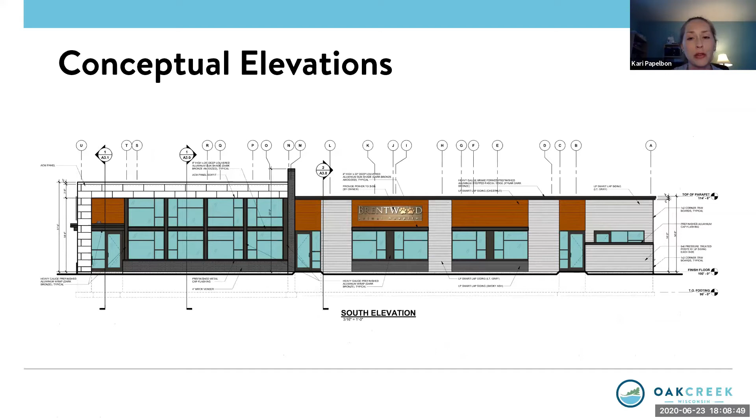On the screen, these are conceptual elevations, but this is what the south elevation of the proposed building would look like. This is the entrance on the south elevation.

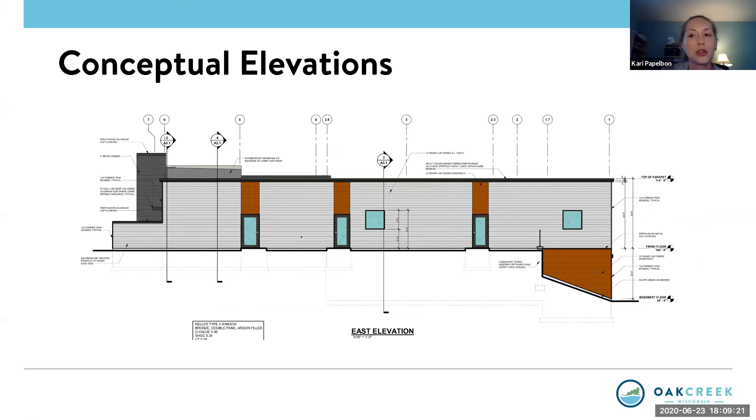And then on the east elevation, this is the conceptual elevation that you might see partially as you're traveling westbound on Ryan Road.

Should this be recommended for approval and proceed to conditions and restrictions at the next Plan Commission meeting, these are some of the items staff will be incorporating into those proposed conditions and restrictions for consideration: landscaping for parking areas, since we have a lot of parking adjacent to Ryan Road, we have requirements for screening along public rights-of-way. Probably some additional wraparound landscaping on the east side will be required as well. That requirement for review, however, would come at a later date when we're reviewing site and building plans.

Stormwater management and green infrastructure will be required for the property with the addition of the building and the parking. Outdoor storage would not be permitted except for the traditional trash enclosure, and we're not really considering outdoor storage as part of the proposed dog run, but we want to make sure we limit the outdoor storage capabilities, meaning no trash or pallets that might have to go into the dumpster. Just make sure the outdoor storage is limited. Lighting as necessary for the parking lot, and outdoor kennels and dog runs will probably have a couple of ideas for making sure we have those things covered.

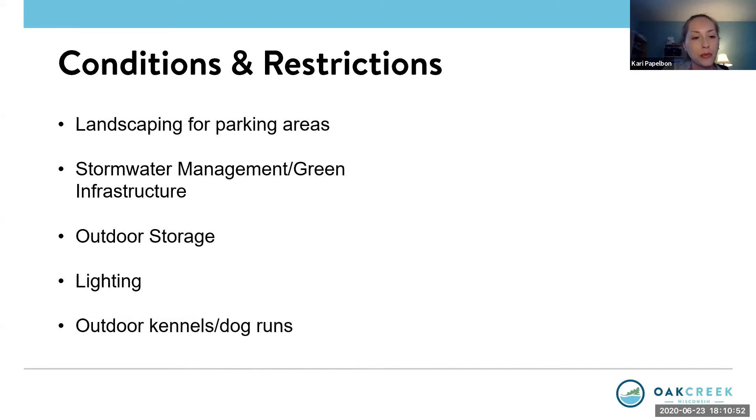My name is Brad Egan. I live at 6011 Artist Bay in West Bend. I am the owner's rep for the project, and we hope to get this approved tonight.

Okay. We'll stand by. We'll go to the commission, and if there's any questions, hopefully you'll be able to take care of it. So, thank you.

Brett, would you like to say anything? Thanks a lot, it's actually Brad. Oh sorry, so Brett's with me. Okay, it comes up on my screen as Brett. That's fine, let me mute my other computer here.

So yeah, I echo what Brad Egan said, that we're interested, obviously, our interest is to get the plans approved so that we can further grow our business and improve the animal care in the city of Oak Creek.

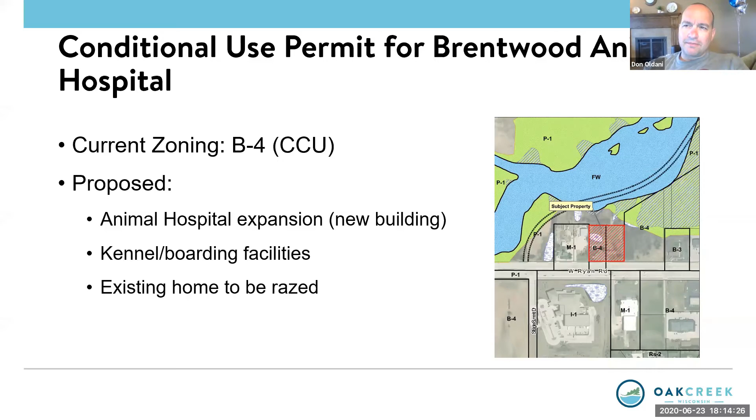I have no questions. Commissioner Seipert. Yeah, I have one question. What about the extended wetlands? Are they going to interfere with the expansion into that area, which is on the northwest corner?

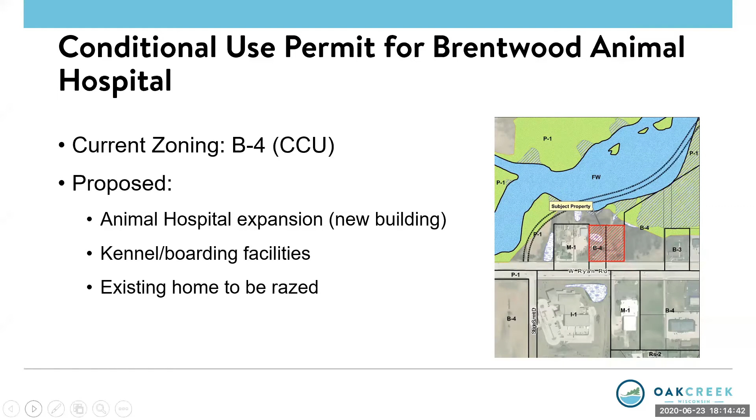Brad, you want to handle that one? Brad Egan, hear me? Now I can, I guess. Yeah, this is Brad. We have a civil engineer retained, and they are doing the stormwater management and will handle the existing wetland condition. Thank you.

Okay, Commissioner Chandler. I do have a question for the applicant. And just also a side note, my puppy, who has passed away some years now, also went to this place. So my question for the applicant is, can you share more information on what's expanding? Is it that you're going to have more kennels, more hospital space?

You want me to take that, Brad? I can address that. So yeah, the main purpose of the expansion is to expand the hospital space, to expand the veterinary side of our business. We are limited currently with the growing community and the expanding pet population of the community by space. Currently, we have 5 exam rooms and we have 5 doctors. And in order to efficiently service the community...

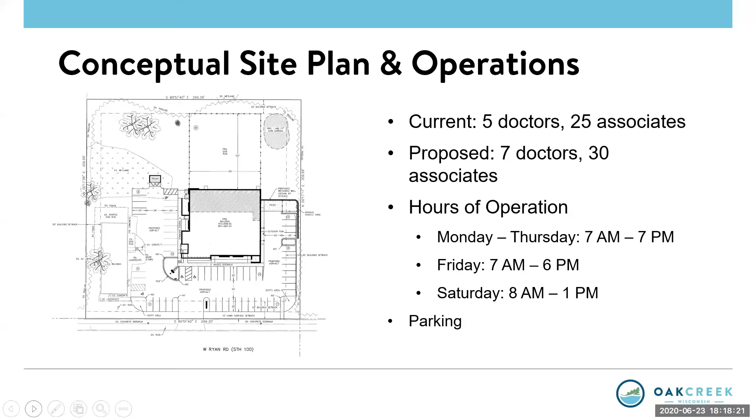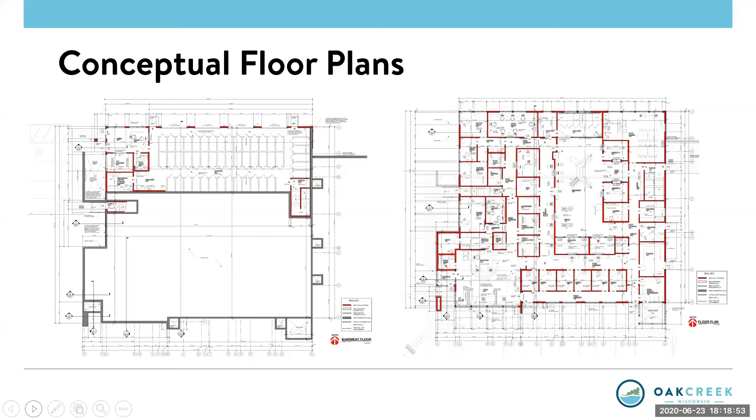The boarding facility, the boarding part of it is we have an exposed basement. There's an increased demand for more interior boarding, so not outdoor boarding, but more higher end interior boarding or inside boarding, and that's going to be the bulk of the boarding for the new facility. So that's the purpose of the luxury boarding, I guess you could say, for the new building versus the traditional indoor-outdoor kennels that we have in the existing building right now.

Does that answer your question, Chauncey? Yes, it does, thank you. Okay.

Is that it? Any other questions? I have no further questions either.

I'm glad to see you're expanding. I think the commissioners hit it right on the head. You've been nothing but an asset to the city of Oak Creek and our pets. I'm glad to see you decided to stay in Oak Creek. It's a testament when half the commission has used the service you're providing. So great to see that you're expanding.

Appreciate that. Thank you. If nothing else, motion, please.

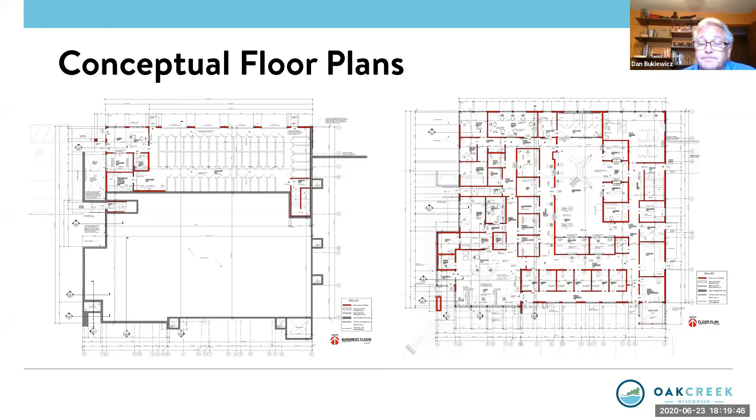Seifert moves that the Planning Commission recommends that the Common Council approves a conditional use permit for an animal hospital with kennel and boarding facilities on the property at 318 West Ryan Road, after a public hearing and subject to conditions and restrictions that will be prepared for the Planning Commission review at the next meeting, July 14th, 2020.

Lorick, second. Roll call. Hannah, aye. Sullivan, aye. Grillo, aye. Lorick, aye. Gavich, aye. Donnie, aye. Seifert, aye. Chandler, aye.

Okay, congratulations, guys, and good luck. Looks good. Thank you. Thank you.

Item 5B, consideration of a conditional use permit by Oak Creek Industrial LLC for a freight yard, freight terminal, transshipment depot facility on the property at 102 West Oakview Parkway. Gary?

Thank you, Mr. Mayor. This is a property that has an existing multi-tenant industrial building on it that had been previously reviewed by the Plan Commission and approved in December of 2016. The current zoning is M1 PUD. It is part of Oakview Business Park, right on Howell Avenue.

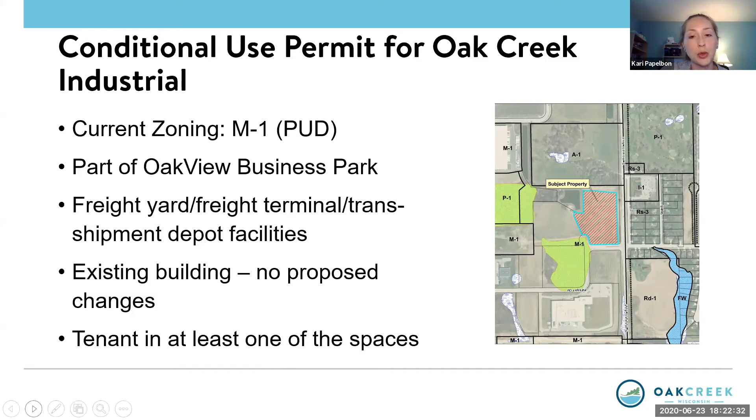Again, it's going to be within the existing building. No changes to the site or the building are proposed as part of this request. They do have one tenant, though that tenant has not been made part of their submission. Currently that tenant would be occupying about a third of the building, and there might be options for that tenant to expand, but there could be up to, at any one point, 6 tenants in that building.

This is a shot of the approved site plan from 2016. They currently have 12 loading docks, although they were approved for 28 on the west side of the building. They also have 20 striped truck and trailer parking stalls immediately across from those docks, and an additional 9 trailer truck parking stalls in the northwest corner, next to one of their dumpster enclosures. They also have employee and visitor parking separated from that truck and trailer parking on the west: 22 stalls on the south side and 113 stalls on the east side of the building, for use by approximately 135 employees anticipated on site at any given time.

This is anticipated to be a 24/7 operation, allowing for the most flexibility for any tenant that would be in there. Hours and days of operation would change based on tenant needs, but right now they're requesting the max based on the current tenant's needs. They also list primary hours, where the most activity would occur outside, from 5:30 to midnight, including loading, unloading, and interior functions of the facility. There is no outdoor storage proposed, nor would it be approved for this conditional use request.

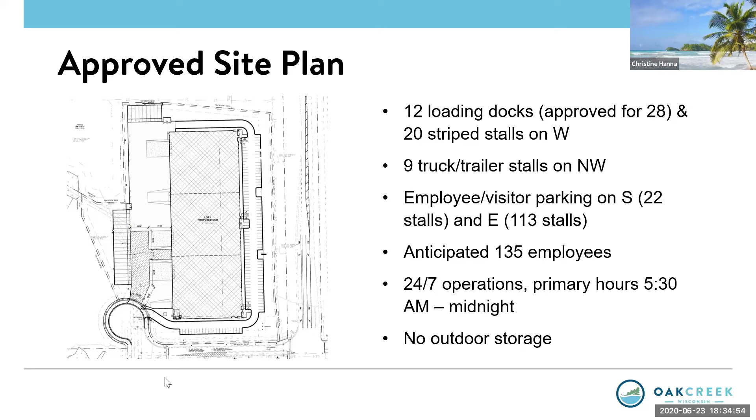Yes, anybody within 300 feet of this proposal, should it have another proposed use at some point in the future, would get notification of the Plan Commission as well as the Common Council hearing. Okay, sounds good, thank you. That's all my questions. Okay, thank you.

Anybody have any last comments? Okay, I really don't have any issues at this time. I think Mr. Randall summed it up. It's very similar to what we did at 6th and Rawson, so I don't have any issues at this time.

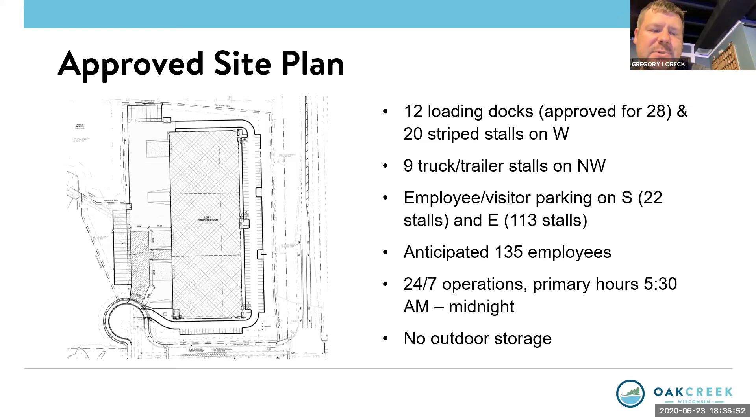With that, we'll entertain a motion. Loreck moves the Plan Commission recommend that the Common Council approve a conditional use permit for freight yard, freight terminal, transshipment depot facilities on the property at 102 West Oakview Parkway after a public hearing and subject to conditions and restrictions that will be prepared for the Plan Commission's review at the next meeting, July 14th, 2020.

Hanna second, roll call. Hanna, aye. Sullivan, aye. Carrillo, aye. Lorick, aye. Kavich, aye. Ladani, aye. Seifert, aye. Chandler, aye. Okay, very good.

Good luck, guys. Thank you.

Item 5C is a lighting plan review. This is the photometric plans submitted for Mod Homes LLC at the residence at Oakview for the internal roadways, and it is located at 10730 South Howell Avenue.

Lori, we got you. Got this one, Mr. Mayor. You got this one, Lori? Yep. What are you here for?

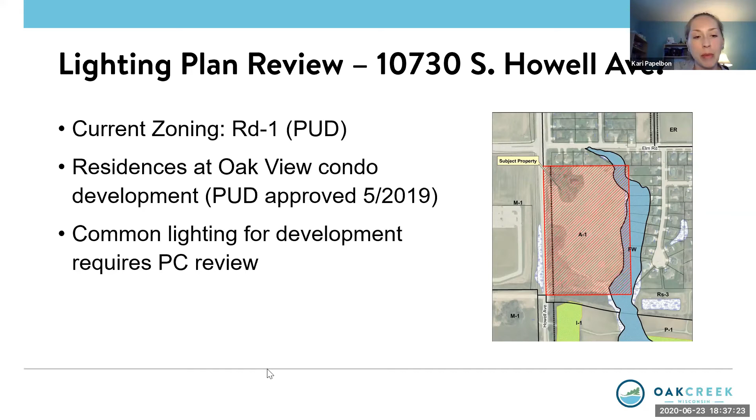Plan Commissioners will be familiar with this property, part of the Residences at Oakview single-family condo development. The PUD was approved in 2019, and most recently the clubhouse and monument sign were approved back in April. As part of the PUD, it required Plan Commission review for all lighting and landscaping on the property. Tonight we're reviewing the common lighting for the development. Landscaping is currently being revised and will probably be brought back to the Plan Commission fairly soon.

On the screen is a conceptual plan showing where they anticipate the proposed light poles to be. This is in two phases. Phase 1 has the majority of the light poles at 12, including around the parking lot for the clubhouse facility, at the entrance, and along the internal roadway. Phase 2 includes 7 light poles for the remainder of the development.

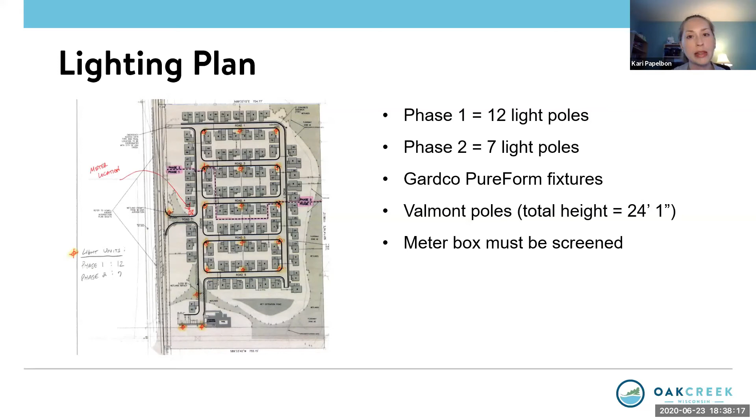They're proposing to use the Gardco PureForm fixtures on the Valmont poles that we see throughout the city. These are very standard, basically what we use throughout the city now. The height of the poles from base to top of fixture is about 24 to 25 feet. There's one meter box location identified on the plan, and we'll be requiring that to be screened, which would be part of the revised landscape plan submitted for later review.

There are no other comments from other departments, save for a possible light pole that might need to move slightly due to impact on the wetland or its location in a wetland. That can be worked out at a later point. If the Plan Commission is satisfied with the proposal, there's a suggested motion on the screen for approval, subject to conditions 1 through 3.

Mr. Mayor, thank you Kari. Kevin, are the applicants with us? Would they like to say anything before we go to commission? We do have Jeremy Samadas, he is able to speak.

Yes, hello, it's Jeremy, 670 North Park Boulevard, Glen Ellyn, Illinois. I don't have much to add to this other than we continue to get excited as this gets closer and closer. That's all I'll add at this point.

Okay Jeremy, stand by and we'll go to the commission. Commissioner Hanna? No questions, thank you. Commissioner Sullivan? No questions. Commissioner Carrillo? No questions. Alderman Loreck? No questions, thank you. Commissioner O'Danny? No questions. Commissioner Seifert? No questions. Commissioner Chandler? No questions.

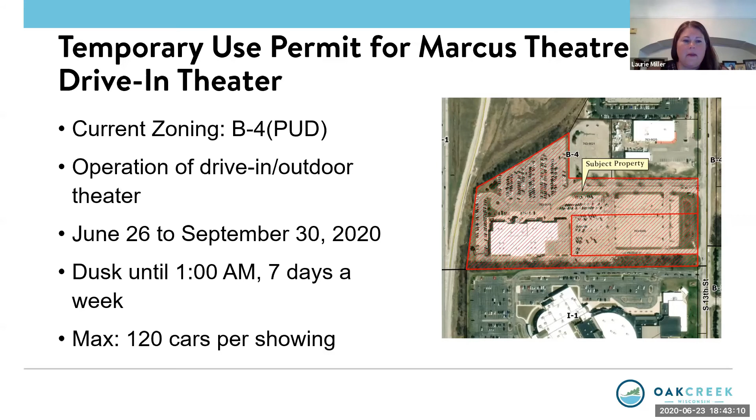Tickets and refreshments will be conducted online only, through their app, website, and they're also offering to take those through phone calls too. When they're going to project sound, it's going to be only through the FM transmitter, so there will be no outdoor speakers. No alcohol sales will be allowed during these events. Any refreshments will be picked up at the front of the cinema, at the front door, but all the food preparation will actually be occurring inside the building. The building will be open for restroom use also during this time.

The theater is planning on doing a gradual reopening of also the indoor theaters, so this will occur over the next couple of months. Unfortunately, the site plan really didn't address how they were going to handle the extra traffic pattern and also extra parking capacity issues that might occur, so the Plan Commission may want to have a discussion regarding that.

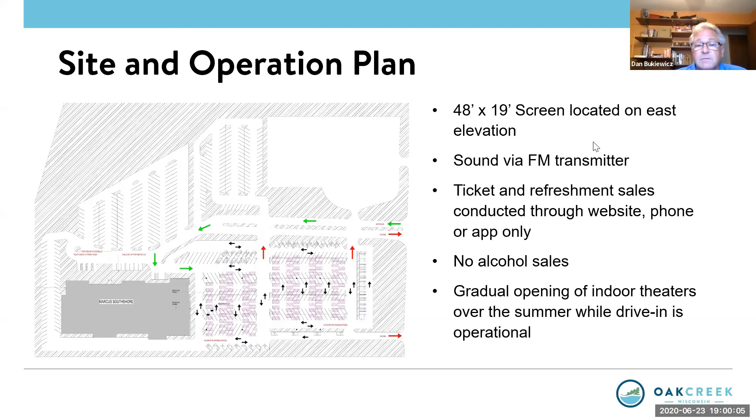I see that it expires September 30th, just in time for fall and winter. Is there any planning for this to become a year-to-year permanent thing over the summer at Marcus?

I somewhat hope not, because we'd like people to patronize our regular indoor theaters and have those be busy and vibrant places. This is something of a compromise we're making with ourselves to provide entertainment in a safer environment, but not with the quality of sound, projection, and immersion of an indoor theater. But should we still be living in this COVID environment where people don't feel safe indoors in a group like a movie theater, I would come back next year to look for another summer of outdoor performances, should we find ourselves still in that environment.